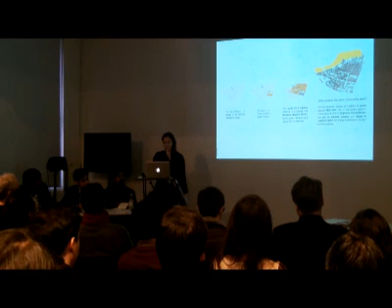And the diverse character will be erased. We believe that to start providing some answers to the informal, especially in the case of Dharavi, we should not erase the existing condition, but should work with the many different layers that Dharavi has, as you can see here, and learn from it in order to develop an integrated strategy.

And this is what we could see. It could be an initiation strategy for Dharavi: identification, relocation and requalification, and new connections and new uses.

We say that if we want to learn from the informal logic and link informal and formal territories, we should have a strategy that starts by identifying the central core, relocating some of these activities towards the edges, requalifying Dharavi as a whole, establishing new connections, especially with Bandra Kurla and the university, in a more productive manner, and introducing new uses not only in Sector 5, but throughout the Dharavi territory.

We have four different approaches integrated within this main approach. Juliana, I will explore the role of space of engagement in the central core as an identification strategy. SEPA will deal with the precarious conditions of the edge and the migrant situation, since Dharavi is the first entry place into Mumbai, the largest one in Mumbai. SIDA will deal with industry and the requalification and relocation of the recycling industry to the marine station sites. Bhushan will deal with Sector 5 and how we can create a more productive link between these two territories.

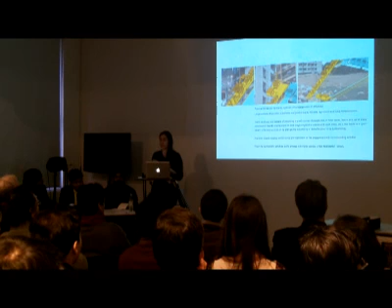Although they do the intervention already with a park and all the provisions, everything is destructed after a while. So how could we manipulate these principles in order to achieve a better intervention?

I take this case of Chamada Bazaar in the leather industry neighborhood, and see that the engagement of three-dimensional surface creates a series of thresholds, as we can see in this picture, that allows different activities to take place. Another principle is that institutional void can act as a catalyzer of community engagement through the dispersal of knowledge, public service, and other cultural enablers.

This structure tends to have a larger scale than the surrounding activities. The units tend to be larger, and they relate strongly to the immediate surrounding, creating public spaces like this within the fabric.

The third and last principle to take into the interventions is the space of engagement as infrastructure and public realm organizing structure. In this case, the Maidan is a cricket field that they have all over Mumbai. It is one of the places that never gets encroachment.

Versus residual space in one of the densest areas in Dharavi - the difference between this one's engagement with the adjacent infrastructure, and this one just being close to this wall of the new redevelopment that created this empty space. Actually, this one is just a garbage dump and also an open toilet.

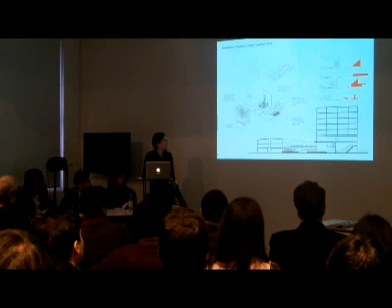Throughout the fabric of Dharavi, the new high-rises that are coming up obey more the rules of the modernists of England and anywhere else in Europe than India's own tradition. Here is a generic floor apartment from a joint family system in India, when you combine different members of the family - but you can start seeing it as different families, dividing basic services together.

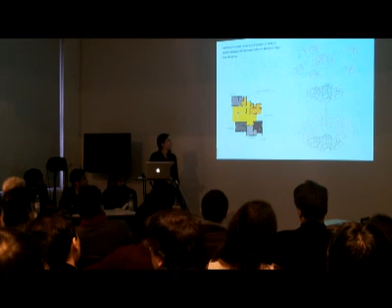The fourth and last kind of intervention that could affect locally is intervening in the 3-dimensional facades, like the favela painting was done in Rio de Janeiro, where such a naive-seeming intervention actually raises the visibility of the area, increases safety, and allows commerce to develop on the ground floor.

The second scale of the intervention is the active spine, and I consider the corridor concept as a conflicted territory that pairs connectivity with separation, a space that buffers between these two worlds, using this as a tool to link formal and informal territories in a more beneficial manner, blurring the boundaries.

Right now the whole Dharavi is segregated. How can we start integrating it without really changing the whole character of the area? Along key territories of this spine, we use architectonic and colloquial interventions to provide needed facilities, not only locally, but for Mumbai as a whole, a city that's developing fast but hasn't developed much, especially in terms of institutional support.

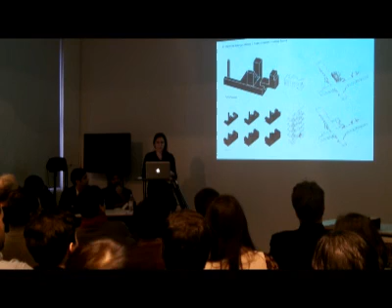How could we regenerate this industry through intervention, like integrating it with the University of Mumbai and giving them new facilities to also showcase their products?

Of course this is just the beginning, but how can a series of interventions act—as we can see where these buildings are, especially in Sector 5, which Bhushan will treat in more detail—to better link informal and formal territory?

The third and last scale of intervention is borders as active zones of exchange, in order to densify the whole rest of the core. So not focusing only on institutional support and on this spine, but how can we figure a plan that could act across the whole of Dharavi?

To link that concept, we cannot just explore the space of engagement; we have to find key areas where to implement it, linking the concept of the space of engagement with distinctions between edges, boundary and borders—where borders are zones in a habitat where organisms become more interactive, while boundaries are limits of a territory that cause division.

We establish here the Nagar division—these are the different communities that migrated into Dharavi, called Nagars. You can see how these borders could start overlapping to create this public realm intervention, working with the active spine, where key areas of institutional support could start evolving.

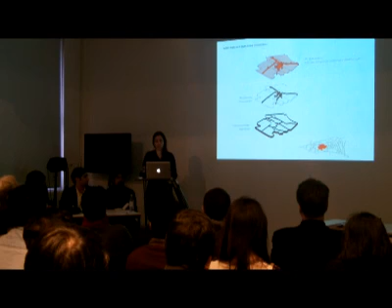So how can institutional support offer something beyond ties to their communities back home—since most institutions are related to religion or to something back home—how can we start establishing something that links all of them more globally? Bringing all this information together, we can start to see how the space of engagement can significantly make a difference in redevelopment strategies for Dharavi, creating and supporting a network across all the different scales.

And this is Dharavi, as they call it, right in the heart of Mumbai, and this is how we come with the interventions.

After the project that explains the strategy to requalify the central area or the core area of Dharavi, my project tries to use the informal way of growth, or informality method, like an organic way of growth that has to be maintained in an informed manner in order to develop an area.

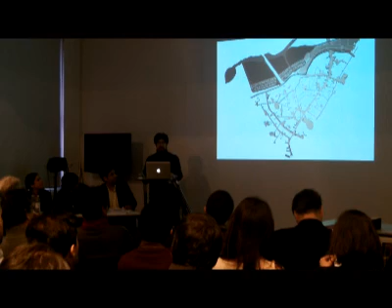And I'm dealing with the edge condition that is still growing on the northern part of Dharavi, and is mainly occupied by the migrants who arrived the latest. It's the latest area that has been developed in Dharavi, as Juliana already explained.

Migrants to Dharavi are trying to either gain experience or make profit, and then decide to settle in Dharavi itself or Mumbai, or migrate back to where they came from. And through the years, there has been established a pattern of migration that has shaped Dharavi.

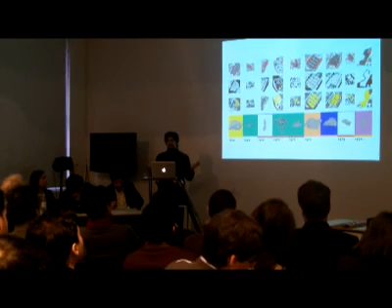Certain people from different parts of India, when they come to Dharavi, know where to go. They have their own neighborhoods represented by their own community, and each community takes over a certain industry or business. So people who migrate to Mumbai, when they enter Dharavi, know where they're going and know what they're going to do. Through the years, each of these communities have shaped their own kind of fabric that works with the characteristics of either the industry or business or their pattern of living.

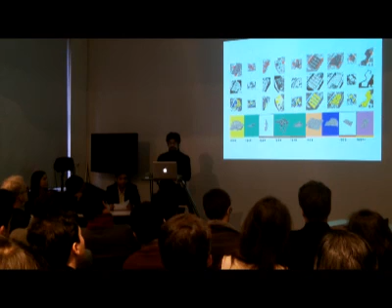And by looking at these characteristics that we see in Dharavi, we can actually learn from this informal way of developing an urban area and try to plan for further growth.

Now, what I'm dealing with is the latest piece of land that has been developed, and it has been occupied by a Maharashtrian community. This area especially has the worst kind of quality in terms of the living quality, and people here are usually not economically able to handle a better kind of life.

And this area is a kind of a no-go zone by government, and as a result, the people there have tried their best to make a situation for their living, and they have the basic kind of living qualities. This fabric has really not been involved in the active sector of Dharavi.

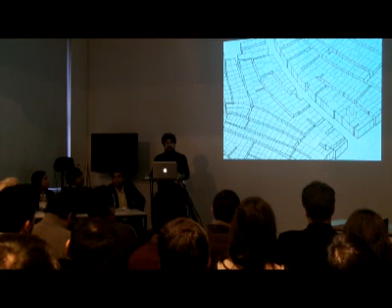This land is growing towards the river coast, and it's been occupied by reclaiming the unstable lands towards the river. As a result of the lack of proper land, the fabric is made up of linear blocks, mainly housing units, and it's immensely dense and has a lack of proper access. As a result, there's no kind of integration of this part with the active sectors of Dharavi. We can see the difference in terms of the types of the units and the blocks, the accessibility, and the mixture of functions.

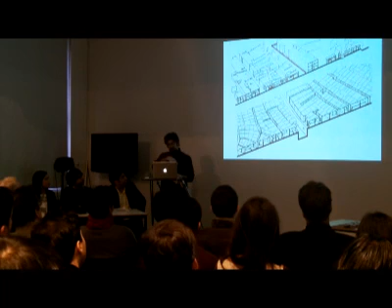The bottom section is the edge condition, and the top is a section of somewhere in the middle of Dharavi. This edge condition has happened, as I said before, by claiming the unstable land, and has grown in a linear kind of way, and it's not being taken care of. It can grow over and over again with the same kind of low quality of life.

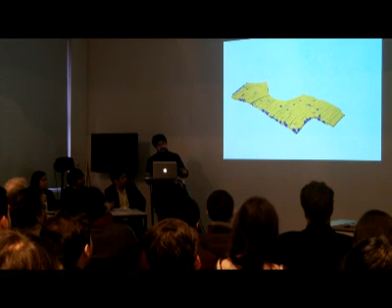And we can see how poor it is in terms of the number of productive units that are in the fabric. The yellow ones are the housing, and the ones at the edge are the small commercial units.

Now, in order to requalify this part and provide a system for further growth, we can learn from another bit of fabric by the same community, which takes over the leather industry, and it has been really successful in terms of industrial activity. But yet this part in the middle also has a poor kind of quality in terms of the light quality.

We can see how there are active units in this center area, and there are almost nothing on the edge. And in terms of the density, we can see how much more dense this edge condition is, and there are certain kind of open spaces in the other part in the center.

This area is composed of housing, industry, and commercial units, and they all work together as a network, which makes it a productive sector. And even within this area, there is another categorization, which is nagars, the smaller communities, that each take over one step of the leather industry, and are again composed of the network of housing, industry, and commercials. If we look closely, we can see how the units have shaped clusters with open space, with different kinds of mixtures of blocks and units, and this is what enables this part of the fabric to become more successful than the one at the edge.

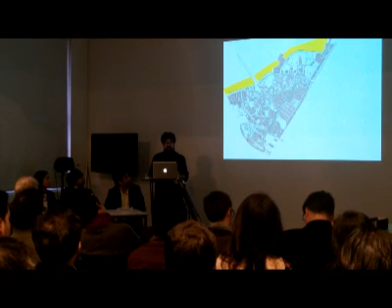But this is not enough for the growth of Dharavi, and we still have the intensity or pressure inside Dharavi that this edge condition can try to absorb, trying to de-densify this core area, as well as provide a system to accommodate the new people who arrive almost throughout the year. Although there's a seasonal migration pattern, almost throughout the year there are certain people being added to the population of Dharavi.

For doing so, we extracted the kind of mixtures we need, the open spaces in between the blocks, the different units, and an infrastructure that combines all these things together.

For providing the units, we should be informed of the people who migrate to Dharavi. So there are unskilled labor, skilled labor, families who tend to live in Dharavi, and families who are just living in Dharavi while working elsewhere, and these categorizations can help design the kind of units needed to accommodate these people.

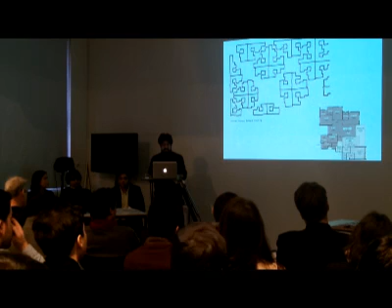Also, the traditional living pattern of Indian families, who tend to live together, and the successful experiences in Mumbai and India, can help us develop this kind of system for Dharavi.

If we start to see how these units can be combined together to shape clusters along with the courtyards and infrastructure, we can develop a system that accommodates people. These spaces in between, or the courtyards, can vary due to need. Either we can have industrial areas or housing areas, or these can turn into each other through time if developed, and this kind of growth is controlled.

Because Dharavi has a limited capacity to absorb people, this kind of growth cannot happen forever. So the physical boundary on the northern part, which is a canal and a green area, can help control this kind of growth.

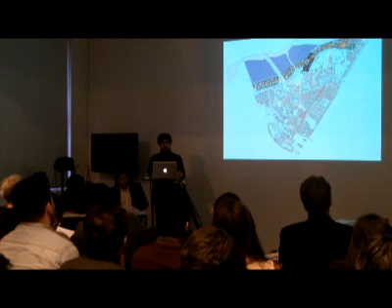Already we can see a plan that tries to de-densify the core area, along with absorbing migrants who come and add to the population of the urban area.

As Juliana has explained in the introduction, Dharavi is a big warehouse of productivity. It has many industries and small businesses working in it, which are extremely important for the local and global market. These industries are plateauing.

They do not have the place to expand, and the skill to develop themselves with changing pollution norms. It becomes important to see how industries can expand such that economic productivity and resilience to change can increase, while simultaneously de-densifying the current industrial region to improve its productivity.

This exercise will at large show, through a test in a recycling industry region, how industry can become a central tool for change rather than thinking through housing numbers.

Above are the major industrial regions of Dharavi. Spatially, when we study the industrial regions, we see any industry works in multiple small blocks rather than a single block, with each block having its own role in the process, which gives them resilience as they can change or adapt quickly because of the multiple players.

When we zoom in, we see the industries work on the relation of voids and blocks. Blocks are designed based on movement patterns, which adapt to changing activity, and voids play key roles: movement of goods, network among players, and industrial spillover spaces.

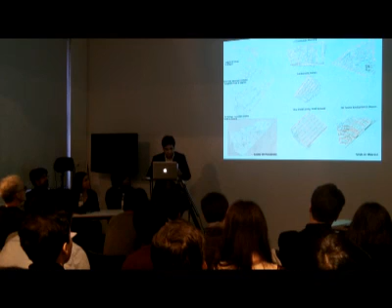As we know, movement plays a key role for industries. The main primary lines divide Dharavi into main zones, and the secondary lines divide it into smaller zones. Each zoning has its own industrial area and its own movement pattern. Recycling industry has a linear movement pattern, leather has a cul-de-sac pattern, pottery and new transit camp have a gridded movement pattern, and small-scale industry has radial movement patterns.

The movement pattern leads to the kind of block which exists in the region. For example, recycling industry has a linear block, creating a deep plan, versus the transit camp, which has a gridded movement pattern, creating smaller blocks. The movement-block ratio also shows where industries exist and where they cannot. The street versus block ratio in depth shows industries have developed in the above three regions, but could not develop in the region of transit camps.

The study also shows how different kinds of industries require a different type of block to exist, which further adapts to its role in the process of the industry. This led to an in-depth study of the block itself, studied in two regions: the recycling and the pottery industry.

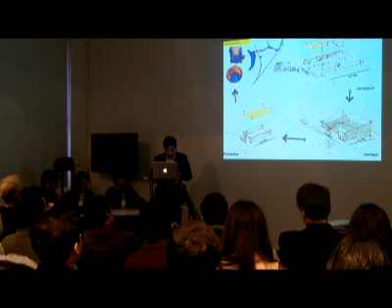In the recycling industry, there are three main block types. First is the collection block, large blocks split into multiple parts based on differentiation of material. Second is the storage, which are double-heighted spaces storing one kind of material and processing further differentiation based on color, etc. The third is the processing block, small in size, each having a specific role in the process of recycling. On the first floor there's generally housing, as the industry works 24 hours.

These are regions where the labor sleeps in shifts. As a process in the recycling industry, the blocks are located from inside to outside: the collection blocks are located along the main street with storage near them, while the processing blocks go further inside. This shows the length, depth, and height, with the location clearly signifying the role of the block in the industry.

In the pottery industry, blocks are double-story with the first floor generally residential — a live-work environment. The block is designed so it has two-sided streets. The internal street is where the process happens, like baking and storage, and the external street is where the sale of the product happens. This is the external street, and this is the internal street.

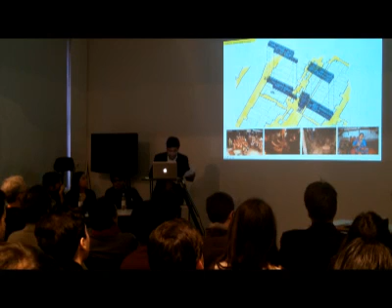The block adapts with the changing role it plays in the industry. The first is the storage block of the recycling industry, and the second is the pottery industry block.

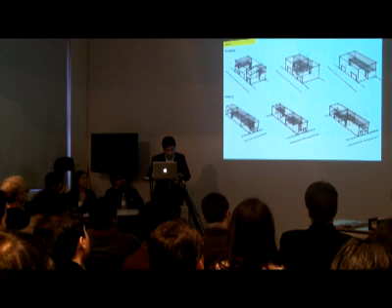Going further into the study of voids, the voids also play a key role in running the industry. The three key roles, as specified earlier, are movement of goods, networking among players, and industrial spillover spaces. But the problem is there's hardly any differentiation among the voids. The street is the only kind of void in the region, visible in both, with no differentiation, hierarchy, frontality, or backside.

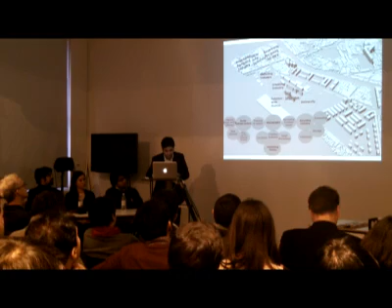After analyzing how two major industrial regions spatially work in Dharavi, I tried to test this understanding for one such industry, expanding the recycling industry into the Mahim railway yard and de-densifying the major recycling industry core. The first step was to build a brief for the expanded site: the recycling industry's three main processes, expanding the university from sector 5 (which Bhushan will explain), along with social facilities for migrant labor, and third, new workshops where finished goods can be produced from recycled material.

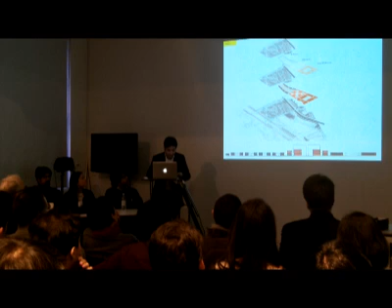To start the spatial process, I overlaid the movement grid on the site, considering the two parallel roads along the street. To test further, I worked on two grids of the recycling industry: the first having different dimensions, and the second having a defined dimension. In the first, the grids with different dimensions created three separate zones, which I felt would create three different regions rather than help associate the blocks. So I tested the second option, dividing the grid equally and trying to develop one cluster between the grids.

The cluster was developed with three clear differentiations in the role of voids: the main street, small vehicular pedestrian streets, and the industrial spillover voids. Accordingly, there were four types of blocks: the collection blocks, which are the main large blocks; the processing blocks, which are smaller blocks inside; the new workshops, which come outside; and finally the new social infrastructure type, which I introduced.

Each type of void is organized around the block of its relation. The storage block is placed along the main road, marked in red, while the processing blocks are located along the small vehicular and pedestrian movement roads. Both work together as the industrial spillover voids. The new workshops are arranged so that on one side they open to the main street, and on the other side they open to the small vehicular street, together creating a small spillover void. The fourth block works as social infrastructure, medical facilities, or other training facilities.

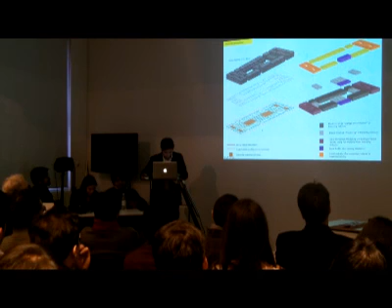At the upper level of storage, I added a layer of housing. These are the sections showing the way the cluster is working.

The voids play a key role in developing productivity of the cluster. You can see the central void being used as the spillover space and the main street as the movement lines—these are the central void. The section also shows how the block can adapt to its changing roles and how new uses can work in tandem with the recycling process. These are the new workshops.

When we look at the large scale, the drawing shows the differentiation of voids in the region: the main red movement lines for bringing in goods or taking them out, the spillover voids for the industries to work, and the small vehicle pedestrian voids for the networks.

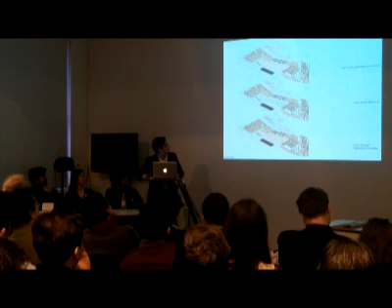Volumetrically, we can see where the different activities are located on the site. The lower one shows the industrial process—the collection, the storage, and the main movement lines—and the process along the secondary lines which is happening. The drawing above shows how the new workshops, incubators, and social facilities will work.

The two blocks along the station will be extended as university campuses from Sector 5. This is the overall massing, and the section shows how the different activities will work together, impacting the productivity of the recycling industry, working beyond the site.

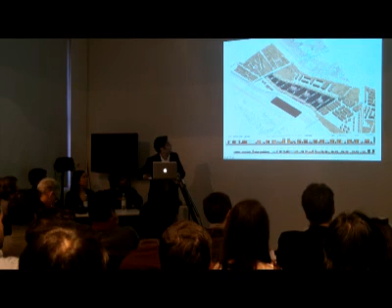Small voids will start opening up to show the impact on the de-densification of the larger site. An image could be read of how de-densification can happen in the current industry and recycling, based on the idea of creating differentiation among voids.

Finally, I would say similar logic could be used to show how we can impact other regions like the pottery industry, the small scale industry post de-densification of the leather industry, which Bhushan has proposed. Thank you.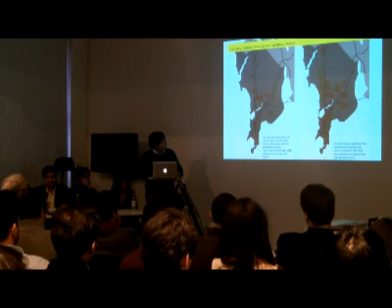This maps out the area where the land values of Mumbai were higher. It is clearly seen that as the economic areas of Mumbai start growing, the commercial areas, the land value, and the surrounding land value also start to increase.

If you look at the Dharavi scale, as mentioned before, it is a strategic point where the Western Express Highway and Eastern Express Highway meet, and the lifelines of Mumbai, the railway lines, meet each other. It is bounded by the road which travels east to west, connecting the eastern and western parts of Mumbai.

Two strong actors surrounding Dharavi, which have already taken over some of its land, are also trying to influence its development—the University of Mumbai Kalina campus, and the business district, the Bandra-Kurla Complex. Also, the residential fabrics are such that Dharavi stands between two residential complexes.

The location of adjacency between the functional district, the university, and the residential areas defines the land value of Dharavi.

Now if we zoom into the site which I'm taking over, it's Sector 5. Sector 5 is the most open space in the whole of Dharavi. What are the factors which make Sector 5 important, and what factors are shaping it?

There is a bus depot, and there are some shanties and some public housing proposed over a period of time in the 1990s. The government had implemented a slum rehabilitation program where they removed slums from the ground level and stacked them vertically, creating vertical slums.

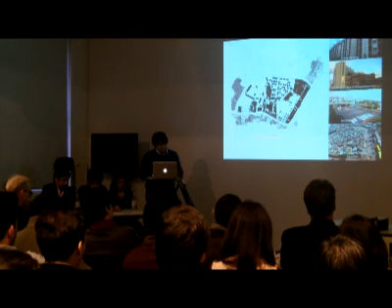The road on the southern part of Sector 5 has a special characteristic of Dharavi, which goes from selling products prepared in Dharavi itself to housing new labor conditions.

If Sector 5 tries to expand, what are the links through which it can expand? There are two thick edges on the eastern and southern sides of Dharavi. The eastern side is the central railway line, which is not permeable, and the southern side is the rest of Dharavi, which has its own strong ecology.

So Sector 5 can expand and get linked to the northern side, where the university and financial districts are. There is potential for Sector 5 to link with the university and BKC, creating a corridor and establishing a special linkage.

If we look at Dharavi, as mentioned before, it is composed of many layers. Dharavi has different layers of association with industries. It has high density housing, different labor conditions, and different spaces of engagement.

But the question arises: does Sector 5 contribute to the character of Dharavi, or would Dharavi exist without it? Does it add to its character?

Looking at the different layers of Dharavi most prominent in this section and surrounding areas, there's the university campus, the Bandra-Kurla Complex, a commercial district, and lots of high density housing which has to be de-densified somewhere.

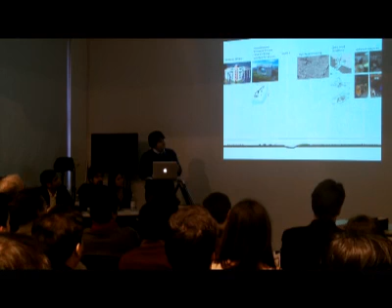There are lots of labor conditions constantly adapting and changing into new forms, and also different industries. There are around 10,000 different industries, some very prominent and some very polluting.

If we look at the layer of industries, the three I'm concentrating on are the leather industry, the textile industry, and the finished products or recycling industry.

The recycling industry is not a full-fledged industry that produces final products and sells them to people. It has only reached a level where it can produce and finish raw materials of plastics and metal, which they sell to other industries or bigger companies.

Whereas in the leather industry, almost everything happens in Dharavi itself, right from getting all the animal hides to making finished products like bags and leather jackets.

Whereas the textile industry is one of the small-scale industries in Dharavi which has great potential to link with other industries and create new synergies, allowing it to expand on a bigger scale.

The textile industry is one where only part of its process is done in Dharavi, and the rest is done in other parts of India.

There are again different housing layers we see: high density housing, and government-implemented slum rehab housing, which are not in good condition and are as bad as the existing shanty towns and slums.

There is also a commercial ecology tied to labor conditions, and the transit camp is a prime example. It shows how these areas restrict themselves from growing into big scale industries, but constantly evolve, creating living and working conditions where, as we observed, people have started setting up offices on the top floors of the transit camps while the bottom floors remain living spaces.

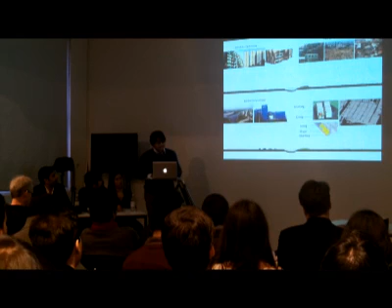Also, the Bandra-Kurla Complex has started to influence the development of Dharavi, where MMRDA, the development authority of that region, has started to include Sector 5 in their zone for extending the Bandra-Kurla Complex.

Now, if we see what are the surrounding regions that are bounded by Dharavi: one is the University of Mumbai, Kalina campus, and the other is the financial district, the Bandra-Kurla Complex.

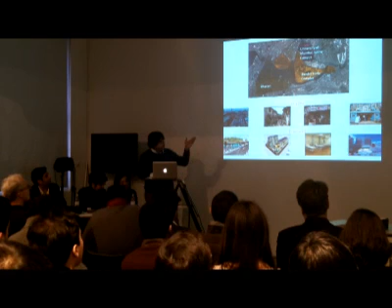As we saw in the proposals of Mukesh Mehta and other proposals, we can see a hint of the Bandra-Kurla Complex influencing Dharavi, in Sector 5 and also in the rest of Dharavi. They have tried to change the existing conditions into a much more formalized manner.

If you look at this diagram, the blue color is the university and the orange color is the Bandra-Kurla Complex. Both are in a monofunctional atmosphere, whereas in comparison, Dharavi is much more multifunctional, where things are quite integrated with each other.

If you zoom into the university campus, it's an extension of University of Mumbai, in the southern part of the Mumbai region, and they have started to develop this big area. But looking at a plan, there is no spatial logic that defines the character of the university. They look like buildings in open space, with no connection to the outer world. They look like a gated community inside the city itself.

Now, if you see what actors are trying to influence the development of Sector 5 — any informal settlement is like a sponge. It tries to take in everything that comes to it and form a logic, a spatial character in itself.

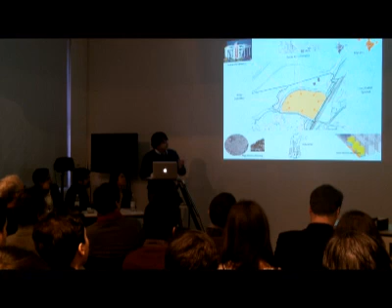Now, this is Sector 5, and there are many open lands in the surrounding area. I would like to create a spatial linkage between the 3-4 sites and try to create a corridor for development of Dharavi, which could be beneficial for both.

Now trying to set a brief for working on Sector 5 — what functions should be taken over by Sector 5, and what should be kept at bay? Because if you try to take Dharavi into the Bandra-Kurla Complex, the land value decreases and the ecology changes suddenly. But trying to get the Bandra-Kurla Complex and university inside Sector 5, instead of expanding Dharavi into Sector 5 or into the Bandra-Kurla Complex — if you see Sector 5, the things taken into consideration are the industries.

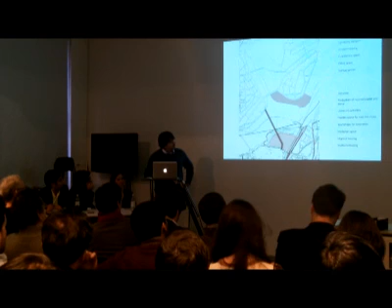The production of recycled plastic and metals, from the recycling industry, as Siddharth mentioned. There is the university campus, flexible space for new industries which can develop because of the synergies of the university and the industries, workshops for innovation, incubator spaces, migrant housing, and student housing.

Our argument is dedensification of the center, shifting the leather industry, and housing supporting the industry — housing that is in bad and precarious conditions. This is the dedensification plan: as time progresses and development happens in Sector 5, some areas in Dharavi itself get dedensified, and we could try to create much more livable conditions.

Looking at the brief before, there is a need — if you try to create a corridor, there is already much higher pressure on the existing roads, that is the Western Express Highway, which is the only linkage from south to north. So is there a need for creating another spatial linkage which would cater as a service road between the 3-4 sites and try to work with each other?

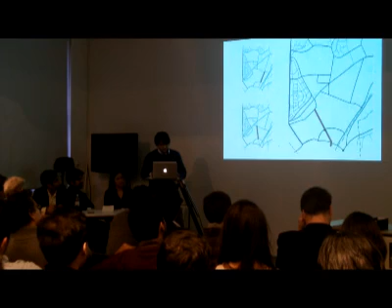Now looking at universities in India and trying to understand how they work — right now, IIT Kharagpur, IIT Kanpur, and IIT Guwahati are all kind of gated universities inside the city, but they are not linked with other parts. Even universities located in the outskirts act as a campus independent of the city. This is the part which we don't want in Mumbai.

What we learned from UCL and Harvard is how to integrate the city fabric, opening the gates to other users of the city, creating different linkages between the city and establishing much more connection rather than just gating it and making it a border. The mobility and road infrastructure, as we understand from UCL and Harvard, gets merged with the city fabric. The morphological clusters of buildings have different site permeability and allow the university to have private space rather than opening from the main road. Also, the opening of the buildings is something to be learned from.

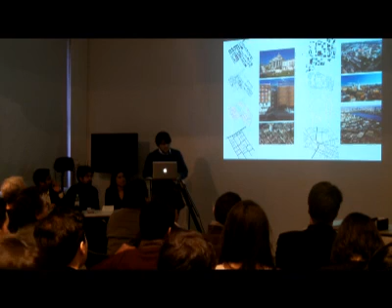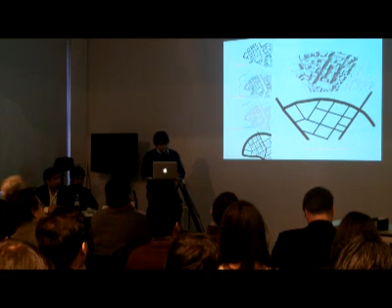If you look at the grid, which can be thought of on this side, the grid allows the movement inside the university campus to get merged with the city fabric. Also, the structures form different pedestrian movement patterns which don't coincide with the heavy traffic on the roads. The formality and frontality of the structures is inverted, so that buildings are entered from a semi-private space created.

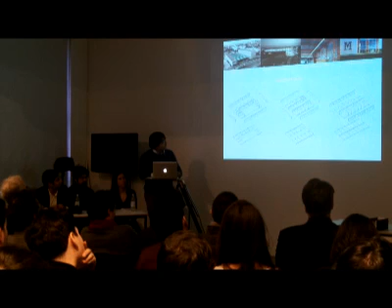If you see the industry sheds used in Dharavi, they have a similar logic to these diagrams. These three industrial sheds each have their own character, and the processes happening in the industries within the informal region can take place in these sheds. These sheds have frontalities, which in the middle diagram you can see inverted. The sheds are accessed from the inside corridor, whereas in that other diagram the sheds are accessed from the outside region.

Now, the arrangement of sheds: how the urban arrangement of sheds can help free the ground. Also, composite buildings can work with industrial sheds. If we learn from Ventura Lambrate in Milan, Italy, we see how industrial sheds work with composite buildings of different types, making an integrated project.

If you try to arrange industries on a horizontal ground plan, then there is less open space, which is what Dharavi has. It has got less open space, so we have to find a certain way of stacking the industries, both horizontally and vertically.

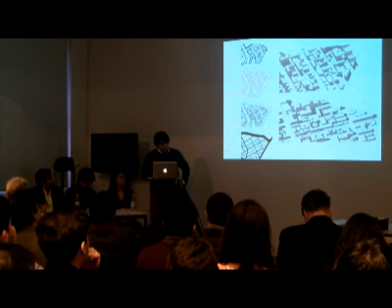If you look at the grid of the industries, the grid allows us the flexibility to form clusters of sheds. It also allows different typologies to mix with the industrial sheds, and allows different movement patterns, creating morphological clusters where industries could share their processes within the building.

The plan shows the road network and hierarchy in the given site. If the road is extended, it has a character to be maintained and taken into sight. The industrial grid is bigger than the university grid because it also allows different movement to take place, thus allowing the flexibility of different industries and other typologies to integrate and create new intervals.

This plan shows the permeability of the morphological clusters. There is a clear differentiation between the permeability of the two grids, where the university has got much more permeability from the road, but the entries of buildings or structures are from inside - they don't open from the main road.

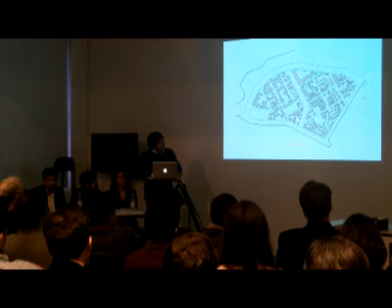Whereas on the industries, the permeability of the structures is at certain intervals where the building opens directly at the main road, and buildings open only at places where they need to connect to each other. This is the morphological build-open ratio that shows the building gradient.

If you see this map, there is a mix of university, industries, labor conditions, and housing. But the mix is not just in plan - it should be in a horizontal and vertical manner as well. This section shows how the university mixes with the labor conditions and with the industry on the right side, starting to create new innovation environments where new startup offices can come together.

The industries can sell their products on this 90 feet road and try to expose themselves on a bigger level. This shows the labor conditions of the industries taking place, giving opportunity for new industries to spring up. As we go towards the 90 feet road, the labor conditions change from industries to commerce and then to other industries.

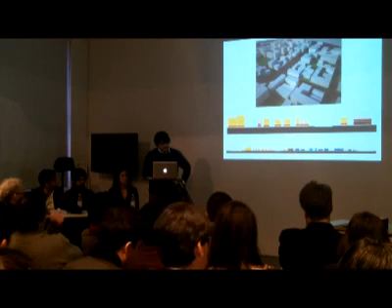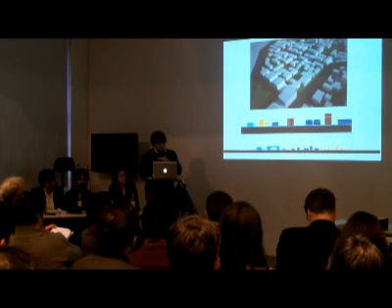Now, where the mix happens between industries and university, the industries work with the help of technical knowledge from the university, creating spaces where new things can get tested and new industries could spring up. For example, the leather industry and textile industry come together to create something within itself that supports the production of the leather industry and creates new products. The cluster shows how two industries work together, giving an opportunity for synergies to happen, thus creating a new industry. Different arrangements and organization of sheds allow different processes to take place.

The diagram on the top right shows the vertical and horizontal movement. It can be seen that the structures are connected and the entry depends on the function of the building. The diagram on the right shows the shared spaces used by the clusters.

The spaces are shared not only within the buildings in the clusters but by other actors as well. There are shared spaces between university and industries where new industries get introduced, tried, and developed further. On the ground floor, products produced by the industries are sold, giving them a bigger platform for exposure. The diagram on the lower right shows how space is created between the university campus and the industries, where there is a campus feeling as well as segregation for industrial production.

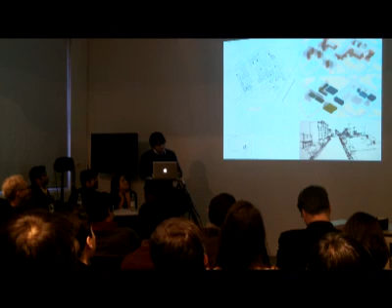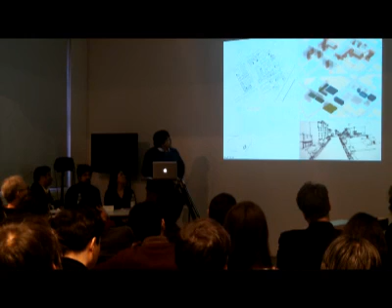The cluster shows how the industry works with the housing. If you see this plan, the industrial sheds are on this side and the residential buildings are on this side. But there are shared spaces between the two fabrics, between the two different functions and structures. Some spaces are shared on the ground floor, and some spaces are shared completely. The movement pattern shows how they are connected.

The ground floor is residential, or the ground floor is industry with residential above. There are also some institutions which share knowledge with the industries, trying to create a linkage between the work conditions and expand those industries in a much more technical manner.

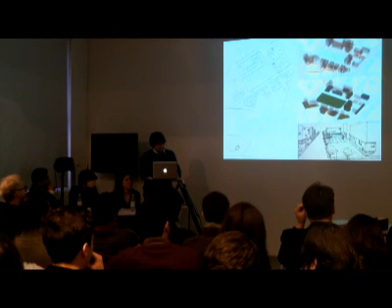This is the third cluster, which shows how the university will directly link with the existing housing conditions and try to create a new open space, new structure, and new synergy. The open space in between can be shared between all the actors, used as a playground by the industries and the housing, whereas the student housing can use its open space to create a campus-like environment.

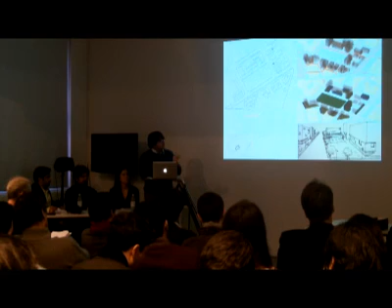These are the spaces where new startup offices can come together. They can have small spaces that they use for a particular period of time and then change. This is the overall scheme, showing the difference in gradient from the lower region, from the industries to the university to the housing.

Now you see there is a hierarchy of housing in Dharavi. There are houses where only pure residential exists, as in the transit camp. What we can learn from the transit camp is how, by putting much denser transport lines, we can avoid big spaces where industries can spring up.

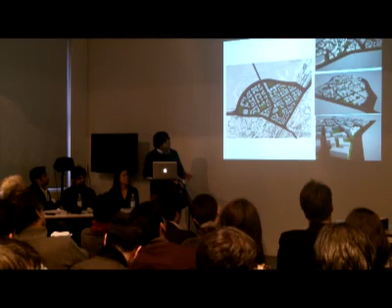This is the potential development of the site, showing its strategic plan. As the area starts getting developed, the core starts getting de-densified, opening up spaces for the areas in Dharavi itself. In the upper regions, where the university tries to expand, it can do so on similar principles, while Dharavi is densified in this manner.

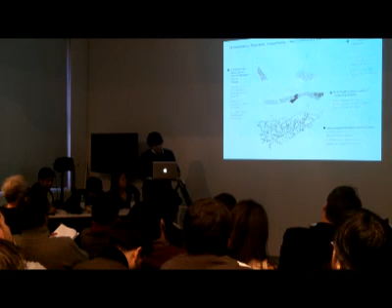If we try to see how these four different structures would integrate Dharavi to form a structure where different actors start agreeing instead of fighting with each other—especially the industry with Bandra-Kurla Complex and the housing there—we can see that this space of engagement would densify the core and requalify the existing fabric, establishing new connections and new uses within the informal territory.

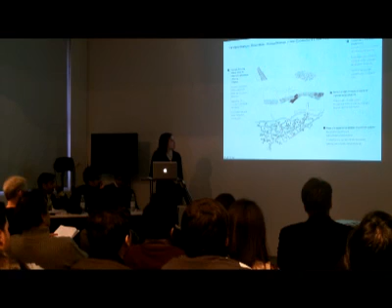And by expanding the edge, the migrants will feed this pattern of growth together with the relocation of the live-work units taken from the core, establishing new connections at the border that prevent further expansion.

And requalifying the recycling industry, which presently recycles 80% of the garbage of Mumbai—all the plastic is recycled there. How can we expand this so it becomes way more productive?

And establishing new connections also with Mahim train station—although there is a train station here, Mahim turns its back completely on Dharavi, so how can we open a new entry point?

And the industry-based innovation neighborhood, relocating some of the existing fabric, especially the industrial parts, and establishing new connections with Bandra-Kurla Complex in a more productive manner, not in the way it currently happens.

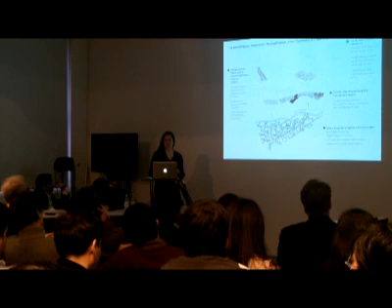Instead of looking at Sector 5 as a piece of Bandra-Kurla Complex, we can start looking at how a piece of Dharavi can benefit from its surroundings. Bhushan explained really well how, instead of benefiting only Bandra-Kurla Complex, this can benefit Mumbai as a whole and not become another segregated environment.

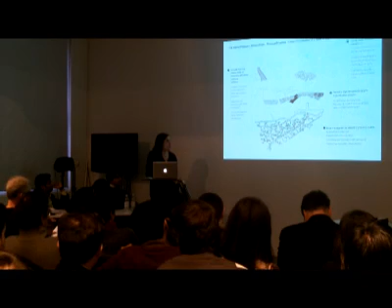And inserting these new uses that link formal and informal settlements in a more strategic way.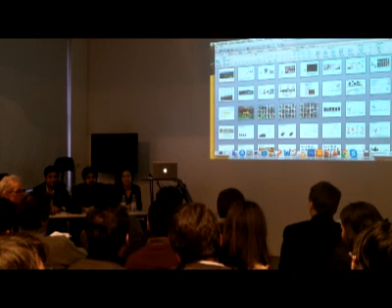Well, I think you guys have a tremendous amount of information collected online through these two groups, and I think you really show existence in this particular site. But I think it's worth saying you may need to develop more effective ways of presenting, putting it more succinctly. Your audience has a certain amount of stamina, and you have to be charitable to them. But I think it's extraordinary that you've been able to understand

typologies of housing and urban typologies that developed specific activities here. But there was something at the end of the presentation in your final summary that made me think about an issue regarding the different strategies and issues you're addressing individually, the fact that you told us two key pieces of information: the train stations, and how this particular site is connected already to surrounding areas.

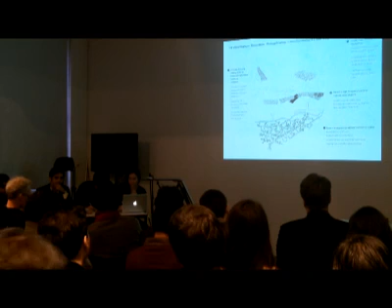I think it's important to state that there are some connections already, some interactions already, and that you probably are going to reinforce those, while at the same time creating new connections with two key areas you've identified on the other side: the university and the financial sector. I think that's important.

That's very important. At the same time, I think your presentations are very inward-looking, very focused on your sectors. It's clear you're also trying to create some kind of coherence between them, but that wasn't clear because each one of you presented your bit very focused on it, and with that you lose the fact that this is all part of a larger strategy. So how is it that all these things are connected? It's very important, the connection between them.

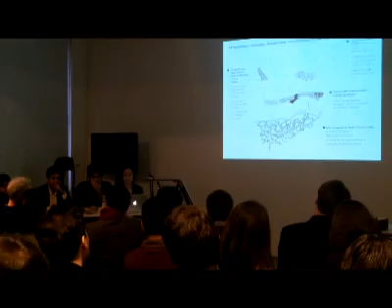And the bit I got more confused about, I suppose, is your housing proposal. Sorry for pointing it out, I think it makes sense - you really investigated the kind of housing and spaces that develop as a result of the activities, and you understood that very well, and then you made a proposal. The proposal, of course, consists of the demolition of an entire sector in order to make it better, right?

But I think again there's a stage you should probably explore, which is how this is going to be implemented so that it's successful. Because there will be a moment in which all this has to be constructed, built, and that could cause tremendous problems with the existing tenants. So I think there's an intermediate stage that needs to be addressed in the process.

Okay, so let me hear, Catherine. Just picking up on that - I just wanted to say my railway yard is an empty plot. The extension I am proposing, the industrial extension of the recycling industry, is an empty plot. It currently houses, it used to be a Mahim railway yard cleaning area, but currently it is an empty plot. That's why I'm proposing an extension of the recycling industry into this region.

Right, okay, I understand, I apologize - I understood that you were going to take this very dense area and replace it. No, this is a completely empty plot right now, a boundary wall currently owned by the railways, and it's part of a strategy to densify. I should have made this clear in the beginning, because when we say we're densifying the core and taking key edges - Sector 5 is one of the key edges that's the least dense, and Mahim Station and the edge that SEPA was dealing with by the river - so we didn't really erase any of Dharavi, just pocket spaces in order to relocate it. That's why he's working with the relocation and expansion of our existing area.

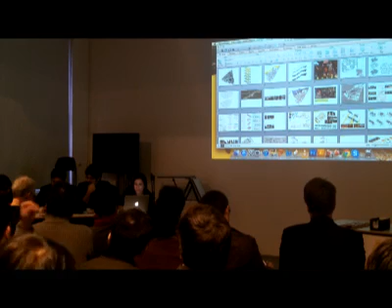In the region which I am focusing on is majorly a live work condition, you rightly put it, but it's generally not based on the family type of live work. It's based around new workers living upstairs, so that the industry keeps running 24/7. It's like the beds are there and they exchange beds just to ensure that the industry never stops. It's a shared bed system kind of environment.

And the focus was creating voids around for the industrial utilization. So there's no need for a social space in the sense sociability happens differently. No, I thought the main void, the center void, these voids would act simultaneously for the social space as well. That's what the idea was.

I think it's also hard to separate, because especially the migrants that work in the industry, we were trying to explain, because of the short time, they come and spend maybe a cycle of 4 or 5 years, and after that it's a decision if they move into Dharavi or if they go back to the village. So it's mainly young people that will come and work almost the whole year, and go back one month to the village, and they all send the money back to the village.

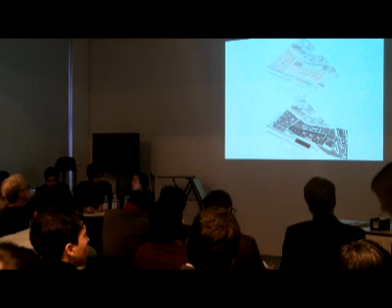So I understand the kind of worry, but it's not like the urbanism we try to establish is in the streets and tries to take away some of the activities off the streets that doesn't allow movement and urbanity as we know, putting the center point. But as far as public realm, yes, I think they can use the other facilities we are providing. But the kind of work they have there, it's not really time even for them to do that.

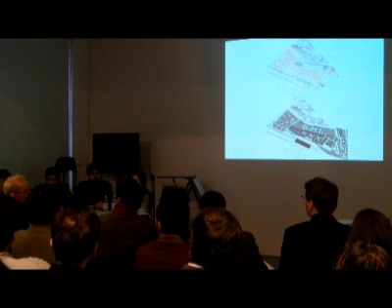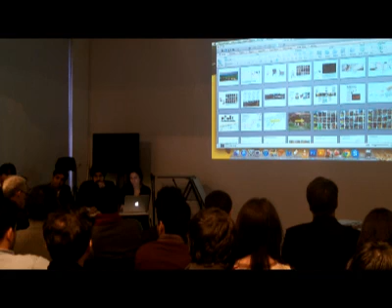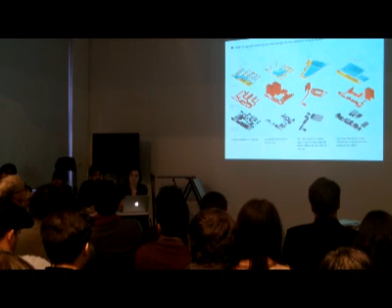And the other was how you would protect, given the communities coming to this place from very specific kinds of backgrounds, the sense in which the sacred and the secular are shared territories. Because I got not one hint, apart from the positioning of the mosque, of the way in which that is such a shared phenomenon in a place like Mumbai. How that informed your, or could have informed your thinking in structuring or restructuring of the proposal.

Okay, I think yeah. Okay, yeah.

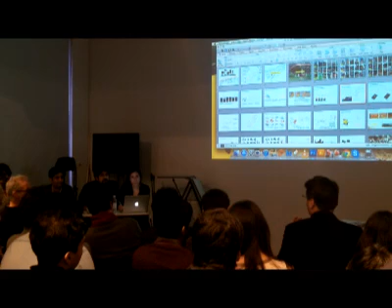It's an immensely complex place, and it's a life work to try and understand it, let alone think what to do about it. I think I've struck with all of you seem to be trying to improve efficiency, improve the utility of this space, and I'm left without any sense of what your intentions are with respect to improving its environmental qualities or its social value to the people who are living here. And it may, to the last speaker's point, be simply a matter of economics that this is completely utilitarian part of the city, and that's all that you want to do with it.

So I was left. There are seriously kind of coherent strategic moves which are about decanting planned intensification on new areas of land, the improvement of the spatial conditions of certain areas. There are lots of kind of tactical things there that you're doing, but I'm left completely lost to what are either the social or environmental improvements.

I don't know. Are you interested in that? Is that part of your intention as an agent for constructive change? It seems that all of you, perhaps with the exception of the first speaker, were wholly concerned with improving efficiency and utility. So I'm looking for a kind of human dimension here, human and even an environmental dimension.

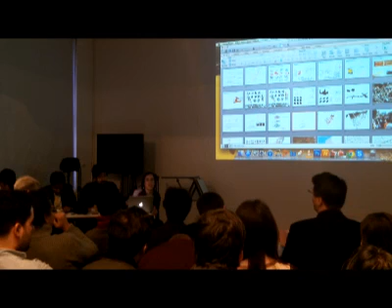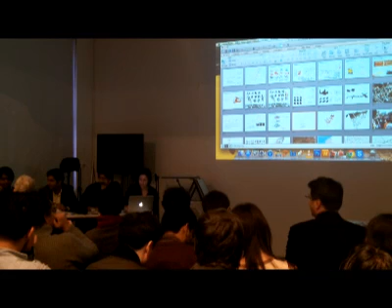Let's jump to this side. Katarina, then Jonathan, and then Carlos. Well, first of all, I really enjoyed it. I feel overwhelmed slightly, but I thought it has a number of very, very good productive drawings in there.

I think if you go back over the presentation, probably the third few images can go. Or in a way, you should be able yourself to judge which drawings work and which don't work in terms of being productive. And particularly in the first presentation, I thought there was information, grain analysis, building up, change of scale, which is quite productive.

There's a part of me who thinks, following on from other comments, that if you could now work maybe at least in groups, it would be much stronger. Because I think if it comes to proposition, you're really not as good as analysis. I think your analysis was fantastic. A group of architects from us could go away and now begin to design strategies because you delivered all the material. But I think your own individual proposition really fell flat by comparison.

It's probably a factor of time, I acknowledge that. But if you could bring together several scales of reasoning, that would be much more effective. Because I think what I'm lacking is both typological specificity, the way you've shown in your space of engagement. I'd like to see more of that than the other proposals.

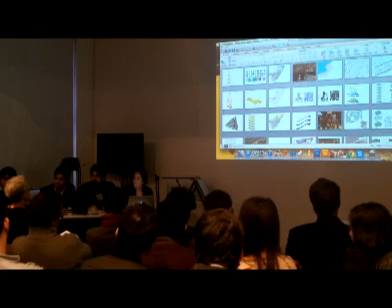At the same time, in your case, it would be good to see more general urban rules. Because sometimes we've been looking at large-scale urban areas where, if you look at glass wall housing blocks, the moment you have some permeability and some mixed use, it works. But I think I found it difficult to understand how you can take the patterns of inhabitation, the patterns of productivity, the patterns of distribution of voids together as a strategy to define potential rules, and then sort of really push

the design project itself. I think we really need to tame what you want to achieve in the design project, or I think you haven't quite taken on board what you could be doing with the material you have produced. That's my gut feeling.

Well, just as a way to follow on from that, I think in each project you could really be, maybe the way to spend the last 3 weeks is to say, right, what are the first steps in each of your strategies? Where, for example, in the industrial site, which is an open terrain, you are next to the railway station. There looks to be like a bridge across, so there's perhaps pedestrian movement.

There's certain ways in which people are moving in and around the site. Maybe that triggers where you might begin to do the first buildings and open spaces. And similarly with your main axis in the first project, where along that axis to actually make your first interventions, and with whom would you talk to actually get hold of the land and structure a kind of conversation? So for me, I would really focus on these first steps to actually prove that all this thinking can actually be taken forward in a very pragmatic and practical way, but also conceptually strong.